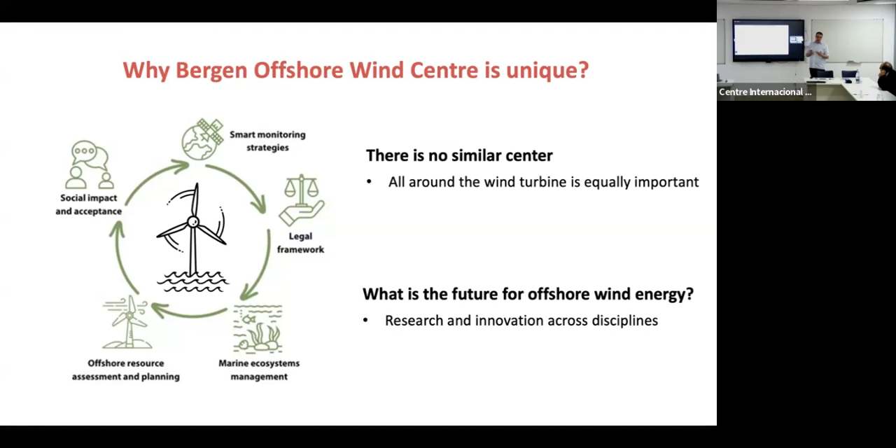We have a lot of phenomena going on, and we would like to take this information into account. So many data, and we have data that we can label as hard data, the wind velocity, the mechanical properties of the soil, but we have also the opinion of people, and this is something we call soft data. So the idea is to use this information to take decisions, and this is something that we are working on. And we are convinced that the future of offshore wind energy depends strongly on carrying out multidisciplinary research.

So a little bit about the center: we have more or less 44 people working in the center. 20 of them are professors and associate professors. And then we have more or less 25 PhD students, also researchers and postdoctoral researchers. Currently we have a project portfolio of 156 million Norwegian crowns. In euros, you have to divide by 10, and this is more or less the budget we are relying on. This is a new center, we started in 2019, and I took over as director in January 2023. So we are growing, we are becoming better, but we are still starting with the center.

Is this a public center, private? It's a center that is located at the university. So you don't have a VAT number? Not yet. No. It's a university. Yes, yes.

Okay, so now I would like to move to the more technical part. And this is something that I always say: it is important to work with methods and with applications. If you only work with methods, you will lose connection with reality. And if you work with applications, there is a big danger that you are not using the best method to solve your application. So you need to try to do both at the same time.

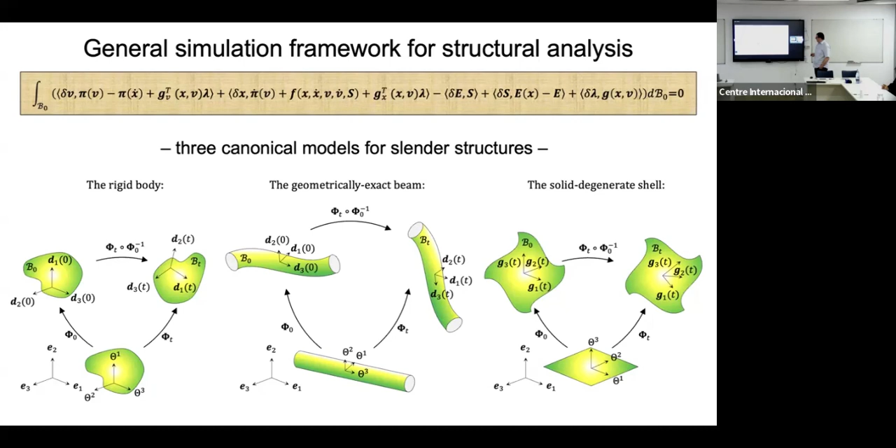So, when we have these kinds of formulations, it is important to be sure that they are working well. For instance, with the static analysis of this structure, a ring, we apply a moment and perform the deformation, and we can see that the load factor versus the displacement develops a trajectory. With the formulation I'm using, the trajectory is always the same. But other approaches based on updated Lagrangian formulations compromise these properties. Of course, it depends on the application. If you want to simulate punching processes, you don't need this setting. But if you are simulating wind turbines, after many rotations you are going to have information that is not right. With this formulation, we avoid these issues.

This kind of formulation can also be extended to general cases. Here we have a shell, and we release the shell to move and deform. We can see that with these methods we can preserve linear momentum, angular momentum, and also energy. But shells are very prone to high frequency content, and this can blow up the simulation. Something we can add is dissipation. Dissipation is good, but we always need to do it very carefully, because we don't want to spoil the solution. So here we can formulate dissipation functions that mitigate the high frequency content. As we have a nonlinear system, unlike a linear system, you cannot separate all the frequencies. We have the theorem for equipartition of energy, and after some time the energy is distributed across all the frequencies. This is why these nonlinear models are very delicate.

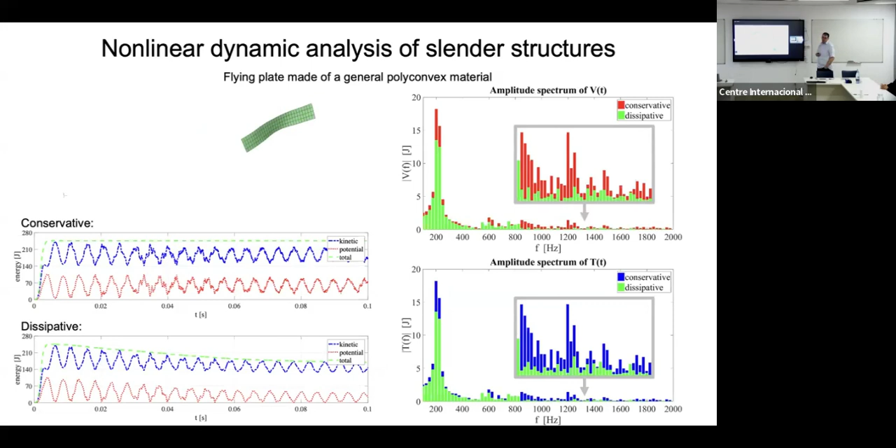Other problems I am working with, also within this framework, are the so-called Kirchhoff rods. I don't know whether you are familiar with this formulation, but basically it is not possible to derive a primal formulation, because these non-shear constraints are not integral constraints. So you cannot have a primal formulation and you need a primal-dual formulation. But if you consider some simplifications, for instance a symmetric cross-section and a rod that is initially straight, this is the only case in which you can develop such a primal formulation. This is what we did a couple of years ago. Our motivation was to investigate mooring lines for floating wind turbines. But you can use it for bridges, or any rod, with this kind of formulation.

And then something that we can see here is that we have the geometrically exact formulation, which is basically a generalization of Timoshenko, in which we have shear deformation. And you can see if the shear constant is low, the vector that is perpendicular to the cross-section is not tangent to the mean line of the beam. If we are increasing this factor, we are going to see that this model is converging to the solution provided by the Kirchhoff rod.

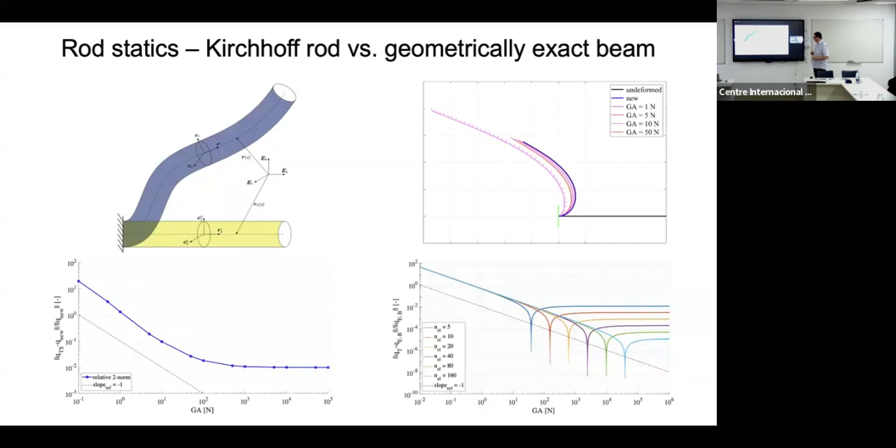And therefore, you can see this peak here, and this peak you don't observe here because in this kind of situation, the axial part is dominating, therefore is masking these peaks. And also, the position of these peaks depends on the discretization. So when this edge of the structure is getting smaller, these peaks are moving toward the right. So basically, this gives us a good idea that the model is working properly.

Then also, you can use this kind of model for doing dynamic simulations. You can use this for DNA simulation. You can use this for spaghetti simulation. So there are many things you can do with this. And basically, we have this model in which we apply some symmetrical condition to make the system rotate and deform. And we apply this for the geometric exact beam and also the Kirchhoff rod. And we saw that after some time, the trajectories are different. And they are not different because of artificial numerical aspects, it's because the models are different.

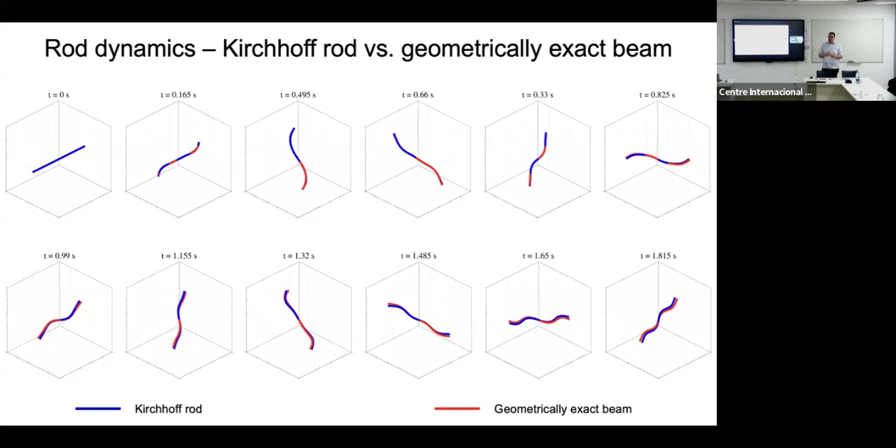Then another thing that we can do with this is, as we are not using rotational degrees of freedom like angles, we are using directors. Basically, we are relying on several manifolds like the unit sphere and the SO3 manifold. And what we have here, in the first case, is a shell pendulum that is allowed to move like a pendulum, but it's a 3D body. And the idea was to try to investigate whether we can find patterns of motion.

But you know, basically what you do when you have this kind of problem, you apply, for instance, modal analysis, and then you have your modes, or you can apply POD. But do you know why we cannot do this with this kind of structure? Because the configuration space is not a vector space, it's a manifold. So you can use POD, principal component analysis, modal analysis only when your space is a linear space. In this case, we are dealing with manifolds, so we don't have that structure.

But something that we can do is, if we have the trajectory on the manifold, we can define a point, a tangent plane, and do a lift of the trajectory. And then in this plane, we can carry out principal component analysis. Once we identify the modes, we can reconstruct the trajectory and project back to the manifold using the exponential map. And this is what this is about. So here you have the manifold. Here we selected one point, and this is the trajectory that we have in the tangent plane.

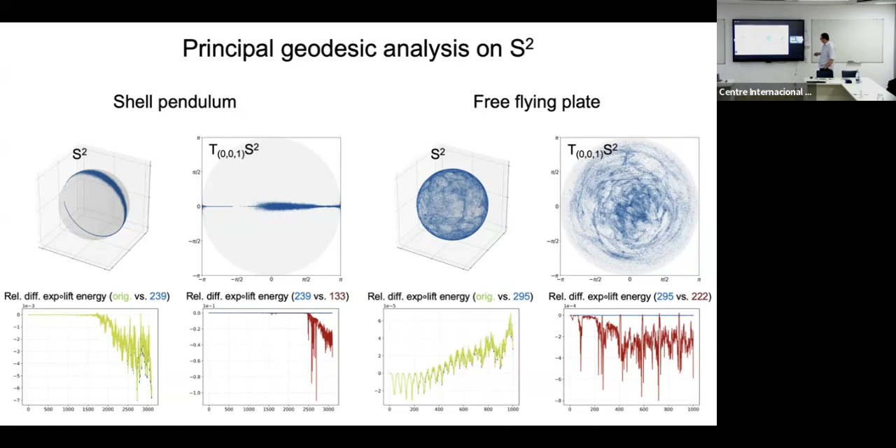So the idea is we would like to use these techniques to analyze real structural problems, to apply this technique to offshore or onshore wind turbines, and to use it for structural health monitoring. Because if you have a wind turbine blade, you can try to follow the frequencies of the blade. But as soon as the blade is rotating, you have geometrical stiffening, and the frequency goes up. Nothing is wrong with the blade, but you have the term coming from the geometrical stiffness. So you cannot rely on observing the linear modes to say something about that structure.

So what we did is we applied this technique, not to do structural health monitoring at first, but at least to see whether we can recognize some abstract structure in the motion of the wind turbine. We did the same analysis: a simulation with the wind turbine, the lift, we computed all the singular values, and then projected back. Then we also considered this with a reduced number of modes, and a very extreme reduction of modes. And the behavior of the energy is consistent with what we saw in the simplified cases.

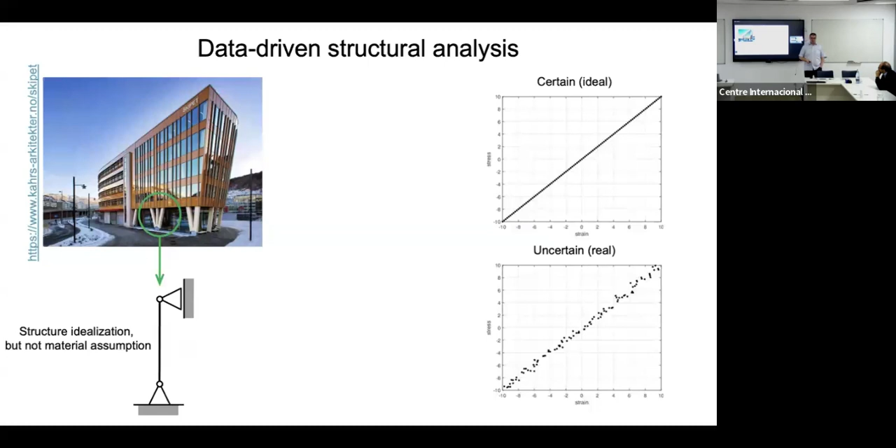So reality is even more complicated than that. But the question is, is it possible to relate this kind of setting with this kind of setting? And the answer is yes. And basically what we can do is to define an optimization problem with the following structure. So we are going to minimize a cost function in which we look to minimize the distance between the internal state of the system with respect to the data we have. So we have here in the second line the data, that is a data set. We have a finite number, as much as we want, but a finite number.

And then this equation we have here is basically the equilibrium, the compatibility, and also additional constraints that we can have. And this problem is a very difficult problem. And you know why? So this is a discrete continuous optimization problem. So we have variables that are continuous, the displacement of the structure, the strain, and the stress, the fields that we know when we solve the PDEs. And then in addition, we have the information coming from the experiments, and we have a finite number. So this is a non-smooth optimization problem, and is a problem that can be classified as NP-hard. It means that if we have a solution, we need polynomial time to check whether this is a solution.

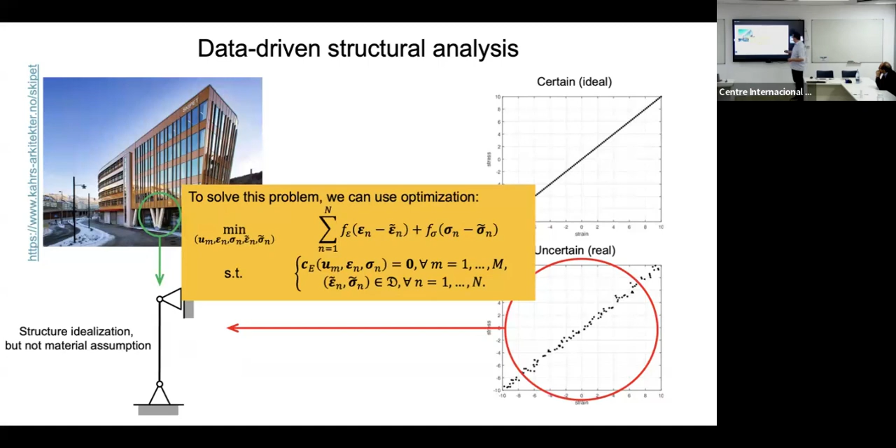So here I have a concrete example. But basically, what we have here is the simplest cost function that we can minimize. So basically, we are having here the norm 2 that we are minimizing, and then we have here stress-strain. Basically, this is an explicit function of the stress as a function of the strain, and then we add some perturbation, but we can have something else. So these are two possibilities. And now when we are dealing with metamaterials and all these kinds of new possibilities we have, something like that can arise. But we need to have formulations that can take into account this kind of situation.

Then what I did here, I solved this problem. Basically, I evaluate this cost function for all the points and different load cases. And what you can see is that the cost function looks like this. And if I ask you, do we have a minimum? Such a thing as a minimum doesn't exist anymore. There are ways to try to say more about this, and this is something that we are developing right now. But it's a very complicated problem. So if this is so complicated for 1D, you can imagine if you have a wall structure and all the components of the strain and stress tensor and so on.

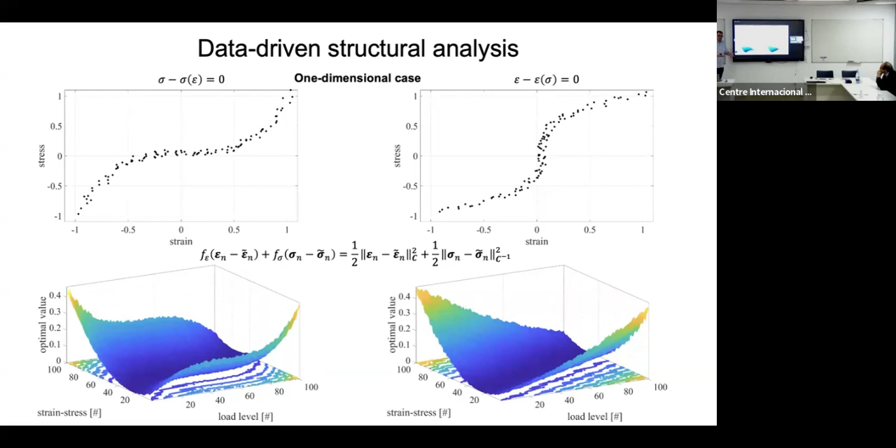So this problem has a very rich mathematical structure. And if you understand well this mathematical structure, you can simplify this calculation and you can obtain results in times that are not as short as the ones that we need to solve the PDE, but times that are maybe 2 or 3 times more expensive. And this is ongoing work right now.

So then I'm going to move to a second part, more on the applications. And I'm going to start with the typical torsion problem, the warping functions. So, you know, blades are made with composite materials. And then when you are going to fit your aeroelastic models, basically you are modeling beams.

So you need to have properties for the cross sections. And this motivated us to take a look on that, because if you have composite materials and also you have a complex shape, multi-cell structure, it's not that easy to determine the warping function. And this was a little bit of theory, but also a little bit of practical work.

And then we realized, when we analyze warping, what is the common practice in engineering? What do we do? We have a problem that has natural boundary conditions, so what we need to do is fix a point. The practical approach is we fix a point to be 0 and then we solve. This works and works well. However, this kind of approach has no counterpart in the continuous setting.

And this triggered us to investigate how to formulate this problem properly. We realized that there are basically 3 kinds of formulations. The first is to look for solutions in a space with average 0. The other one is to impose the constraint with Lagrange multipliers. And the third one, a very good old friend, uses some kind of penalty approach. You can prove analytically that these problems are totally equivalent. You find the same solution, and you can go back and forth. However, the numerical implementation might differ because of conditioning issues and so on.

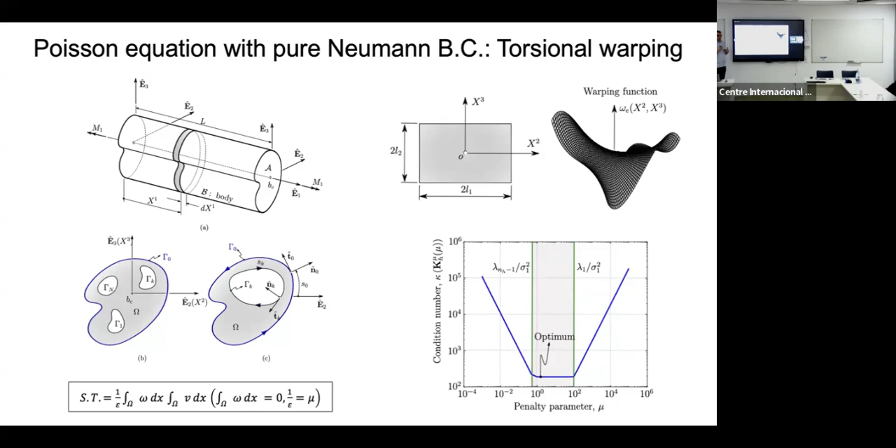So, once we dealt with that, we also realized, coming back a little bit to the previous slide, what happens if you fix the information in one point? You have your finite element model, you fix it, you solve the problem, and you get a solution. And this solution is consistent with these approaches that we have here.

But if the discretization is going to 0, then there is the trace. You have the trace operator that allows you to extend information in the boundary into the interior field. When you have, for instance, a codimension equal to 2, the trace operator is no longer bounded. So basically, you have no theory to deal with that, and you cannot find a limit case for this approach. Probably it's not new, it's known, but we didn't find many contributions in this regard in the literature.

So once we had this working, we investigated different situations. Let's consider a section in which we have two materials. We played with different materials with different coefficients and observed how this modifies the solution. When the quotient of the materials is equal to 1, we obtain what is usual: the symmetric behavior, and here the antisymmetric behavior. But when we have a different ratio, we observe a perturbation.

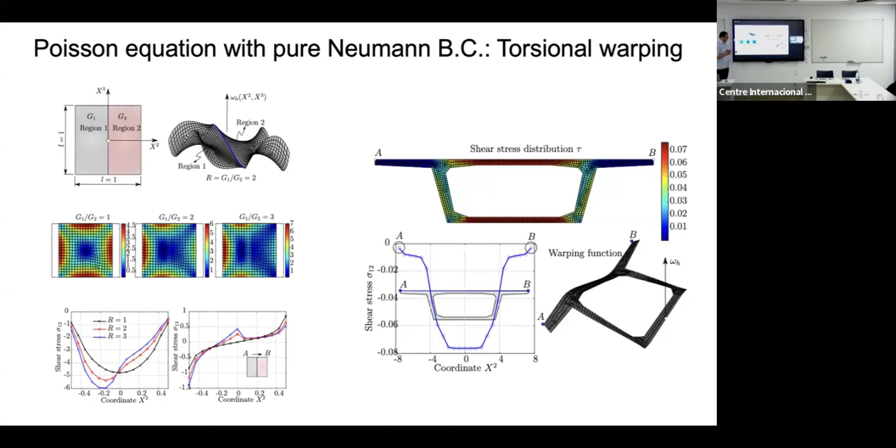Something very important in civil engineering when you compute bridges, when you have loads acting on the bridge, is to know how the bridge is going to deform the cross-section. This is a benchmark that is well established in the community. We checked this methodology, and it's working as expected.

Another application is mooring lines. These are cables immersed in water. In this case, we are considering a cable of aluminum, and we have water at rest. On the free end, we apply a vibrating force, and we give as input the amplitude and the frequency.

We realized that when the frequency is higher than a given frequency, we get this shape, and the structure remains like this, like an L. At the beginning, we thought this was only of academic nature, but indeed, this can also happen in marine installations. The setting is different because you have the anchoring system here, and the pulsating load comes from the free end on the surface. But this behavior is something that we can observe.

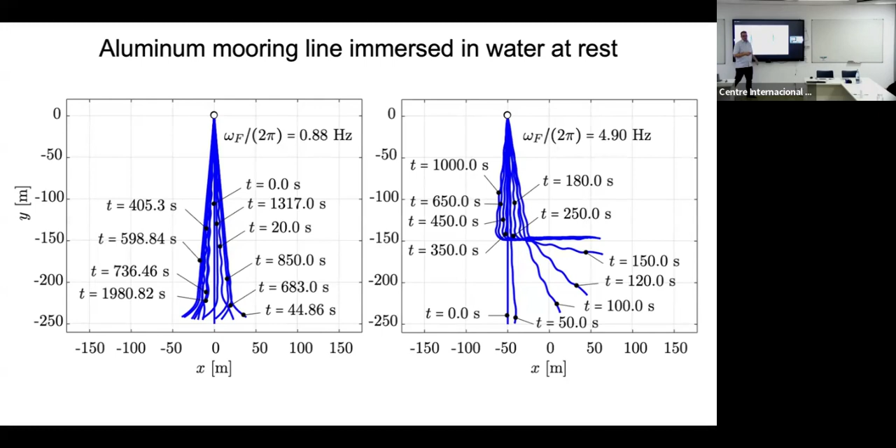So you can see here this frequency. This is the subcritical behavior, and this is the supercritical behavior. And then here, when we have the mooring line, we have force that is tangent to the mooring line and force that is orthogonal. And among all the forces coming from the fluid, we can identify the added mass. We have the tangential drag, and we have the normal drag.

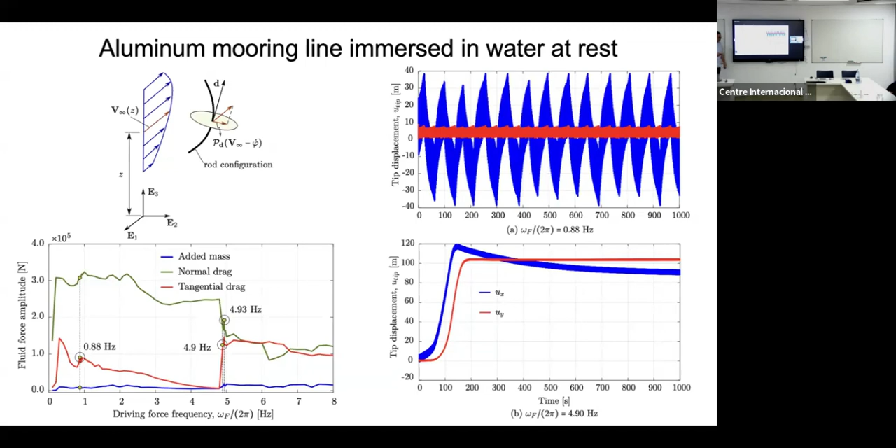And we can see that for subcritical frequencies, the normal drag is the dominating one. But when we move towards the supercritical regime, what we can see is that the normal drag and the tangential drag are equally important. And this is something that you can see in the plots for the displacement. The first one is for the subcritical behavior, and the second one is for the supercritical behavior.

So basically we have models for the structure with slender structures or beam shells and so on. And when we compute the dynamics for wind turbines, we need loads. So I'm not that good with flows like you, Sergio. So I am applying a very modest flow model that is a boundary element method. And this method allows us to compute the loads in a good way, and also to compute the wakes.

And basically, this method works well for wind turbines when you want to compute loads. But if you want to compute more details, you need something better for sure. However, this is also cheap enough. So you have engineering approaches in which you need seconds. With this kind of method, you are talking about hours, and if you go to CFD, we are talking about weeks or months, I don't know.

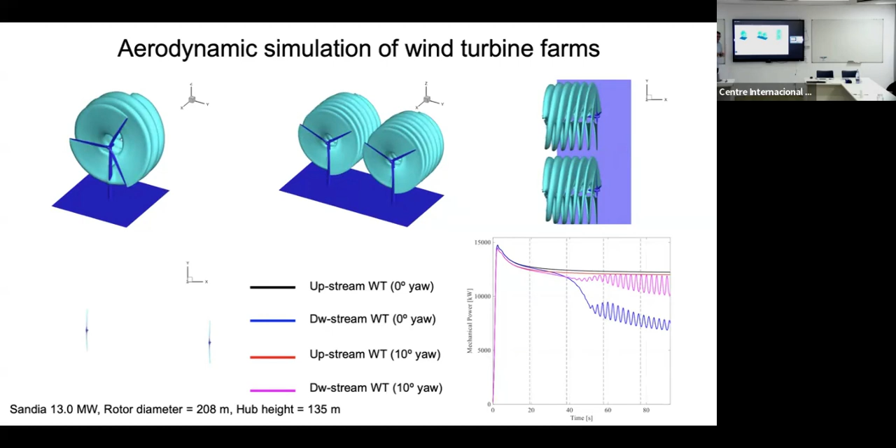And we can investigate several phenomena. And also in this model, we have several things applied in order to have more reliable simulations and also faster simulations. So we have particles, and we have also diffusion models. And we are doing the work now to compute this with the fast multipole method, and this is going to be even cheaper.

And then you can see here, in this plot, we have the mechanical power of the wind turbines. For the first ones, what you have is black and blue. So this is the one that is in the front, and this is the one that is behind the first wind turbine. But if you change the yaw a little bit, you are going to see that the degradation of power is going to be less.

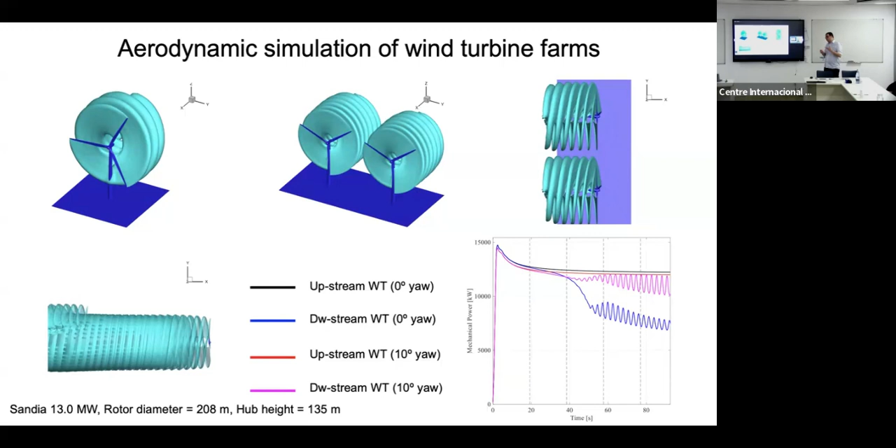However, we have some oscillations there, and these are caused by the interaction of the wind turbine with the wake. We suspect that we also have a numerical component here. You know, boundary elements are basically singularities. And when you are too close to singularities, your solution is not that reliable.

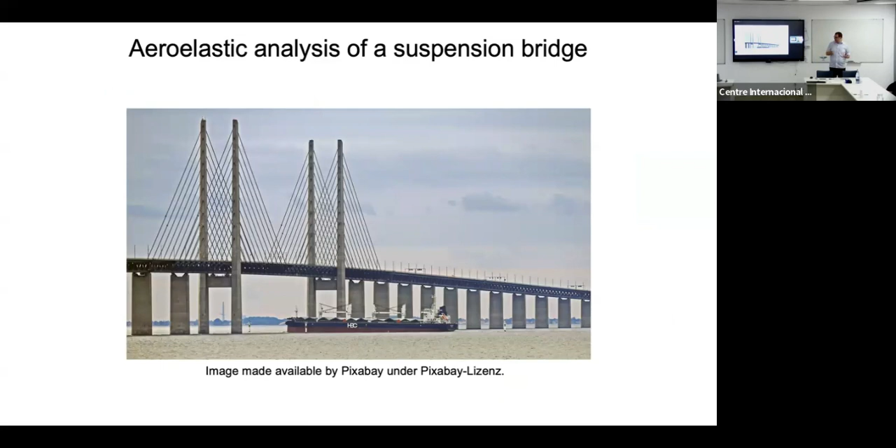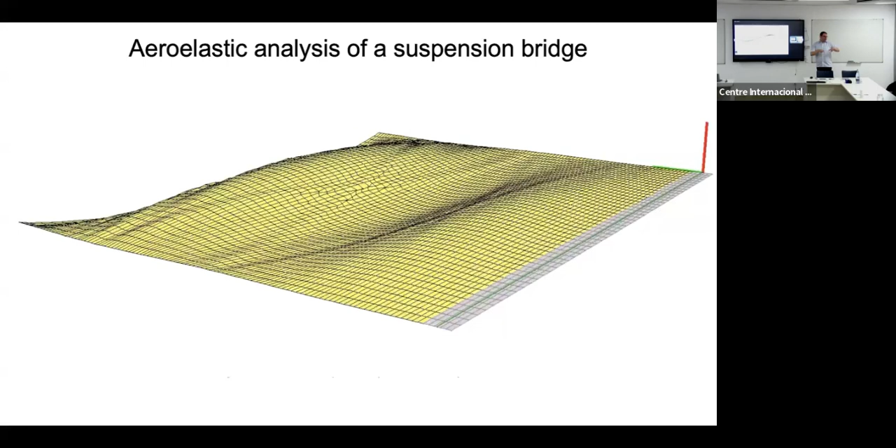And the idea of this setting is to apply this, for instance, to a bridge or to a wind turbine. And this is what we did. This is an aeroelastic model for a bridge, and you can see we compute the vibration. So we have a geometrically exact beam, a nonlinear beam model that admits shear deformations. And then in gray, we have the aerodynamic mesh, and what we have behind is the wake.

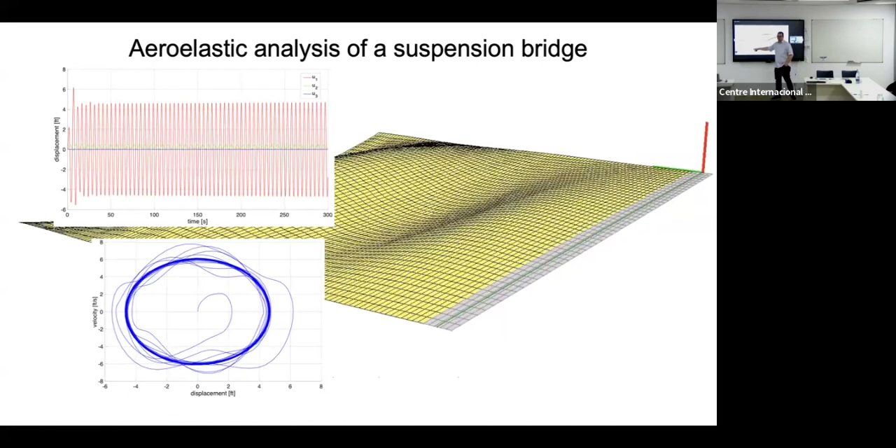And something that we can see is that this structure is reaching something called limit cycle oscillation. So you remember the Tacoma Narrows. When you go to physics, they say, oh, this was resonance. No, this is not resonance. This is flutter, because the wind is blowing at a constant speed. There is no pulsating or oscillating load. This is an interaction.

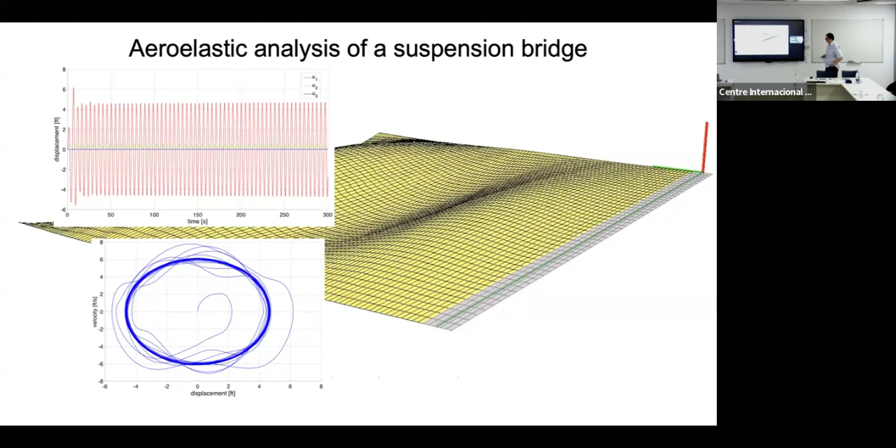So when you are below the critical condition, the flow is taking energy from the structure. When you are in the critical condition, the balance of energy is zero. And when you're in the supercritical condition, the flow is adding energy to the system. So something I would like to comment on is that we have here a fluid-structure interaction scheme that is strong.

And if you like to investigate this kind of non-linearities, you need to have a strong interaction scheme. Otherwise, it's not going to work well in general. And something we did in order to improve the robustness of the method is to compute the linearization of the aerodynamic model. It's a tedious work. So there is no big scientific innovation there, but it's a tedious work.

And we did it and we implemented it, and we are obtaining with the fluid structure interaction scheme quadratic convergence, which is quite weird. I'm not familiar with many fluid structure interaction schemes that converge quadratically. But the reason is not the convergence in itself. The reason is because it's more robust.

So when you are going to a nonlinear phenomenon like flutter, if you don't have a strong interaction scheme, basically what you are going to observe is that the flow and the structure are divergent. So probably you're not going to get a solution. And with this kind of scheme, this is working very well. So they are working together well.

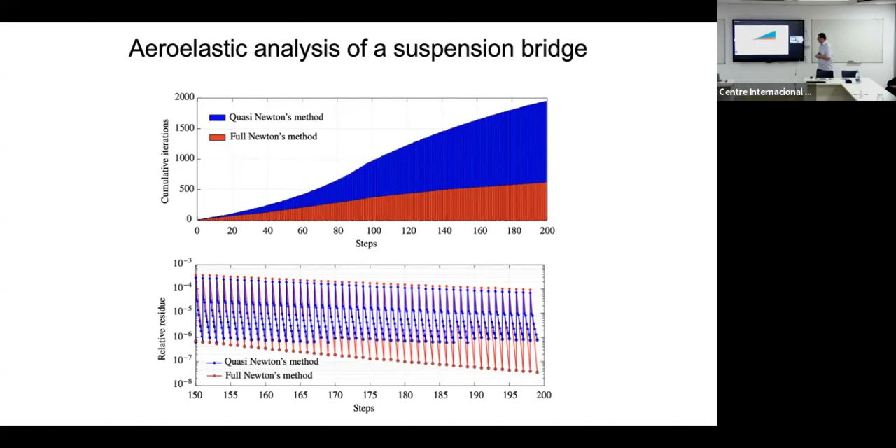And something that we are doing is we don't need to have this strong all the time. So when we have some situation in which the changes are not that big, we use some kind of, this is still strong, but we don't use the full linearization, we use partial linearization. Then when we enter in this kind of phenomenon, we turn on the exact linearization for the fluid. And this is giving us a lot of robustness.

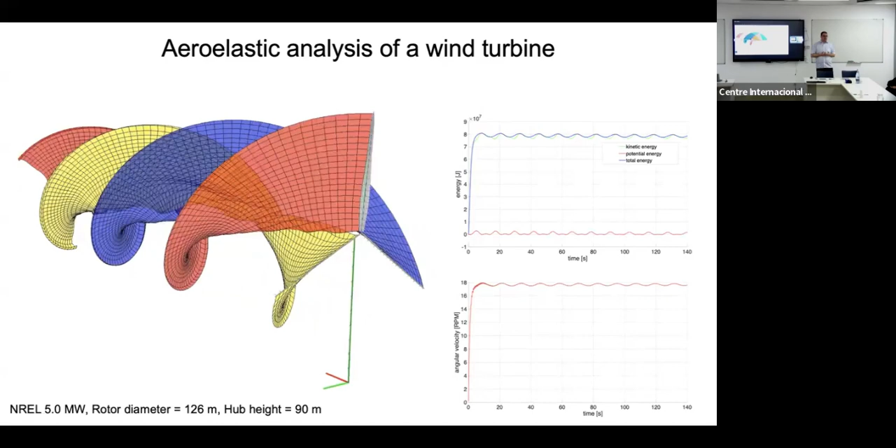And then we apply this also for wind turbines. Here again, we're using geometric exact beams. We're using momentum preserving, energy conserving, or energy dissipating algorithms for integration in time. And these simulations are cheap, I would say.

And here you can see the angular velocity of the rotor. Here the rotor is free to rotate. We are imposing nothing. And then we can see here the mechanical energy. So this is the energy coming from the structure, the elastic energy and the kinetic energy of the motion. So this is also having a very good behavior. And for us, what is important is the long-term dynamics.

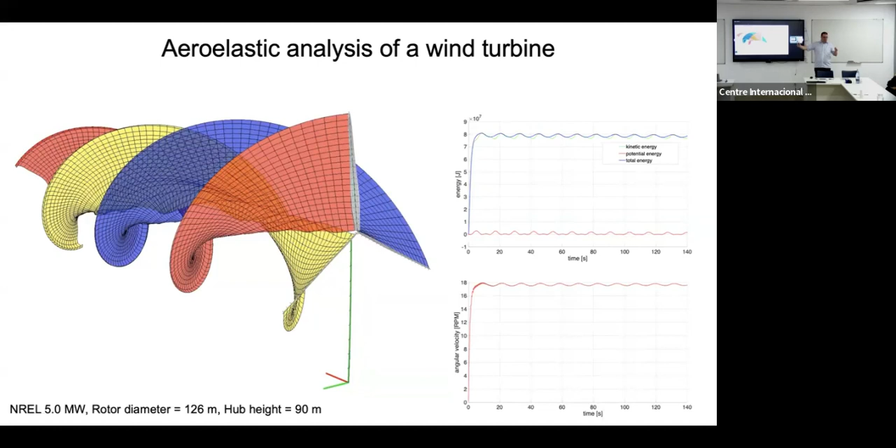And then this is something that we are now starting to investigate. I'm not very familiar with neural networks, but I think we need to give it a try and see, but we need to use this carefully. Not as a black box, we need to try to understand what is going on. And the idea was to apply these neural networks to investigate the ability to predict nonlinear phenomena.

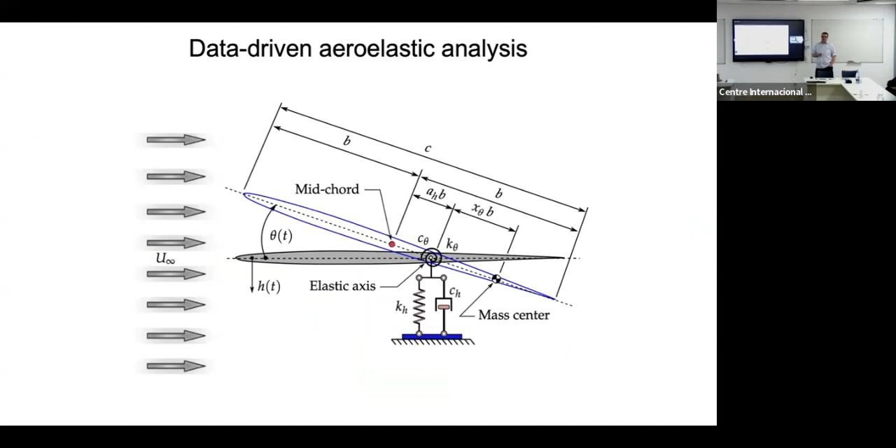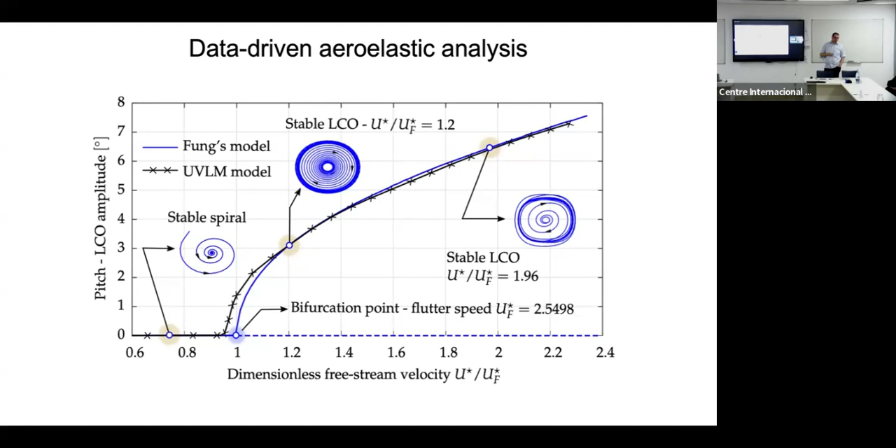And basically what we did is we took two models, basically the structure is the same, but we are taking a very simplified model and a little bit more sophisticated model. And we did the training and we investigated the statistics and the performance of the different neural networks. And basically, if the neural network is not complex enough, you are not going to capture the nonlinear phenomenon.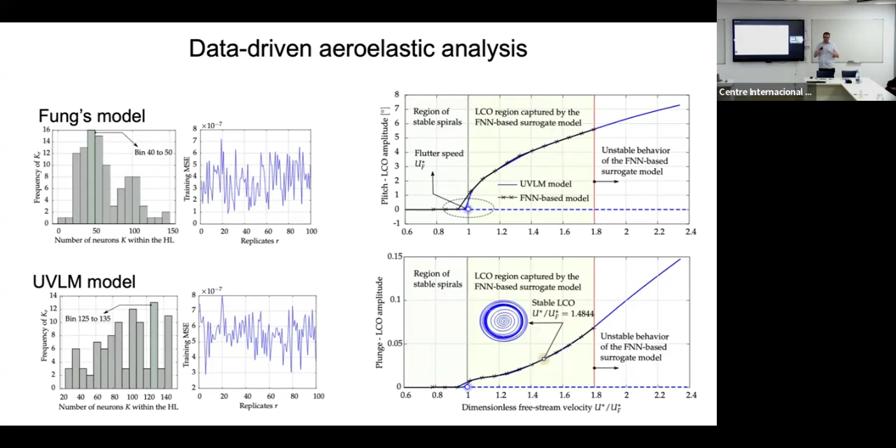So the neural network worked well with the Fung model, that is an analytical model, but for the unsteady vortex lattice method, the performance was not that good. And after some velocity, we observed that the predictions we obtained with this setting were not good enough. So now we are starting to learn how to deal with this, and we are starting to investigate different topologies for the neural network.

So basically, this is the motivation. Pay attention to the models, try to develop good models, and sooner or later you are going to find many applications. I don't like this kind of models that work well for a single application. Sometimes we need to deal with that. It's okay. But let's try to do it a little bit better.

And something I would like to comment to you is I'm not only dealing with computational mechanics. So this is an example of multidisciplinary research. And this is a satellite image of the German Bight. And you can see all these black dots, white dots you have there. So basically what we have here is the velocity field. This is a satellite image, and you can see the wind turbines in these white dots, and we have the wakes.

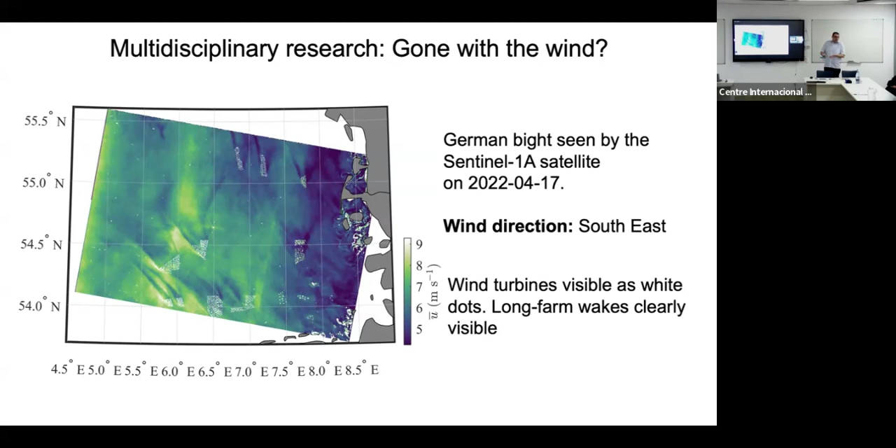So the wakes do exist. And in the wake, there we have basically less energy, and the form of the flow is not the optimal that we need in order to harvest energy from the wind. So the thing is, when we are designing wind farms, it is very important where we are locating the wind turbines. And if in one place we have one operator and in the other place we have another operator, maybe there we can have a problem because one can ask for compensation because you are stealing the wind.

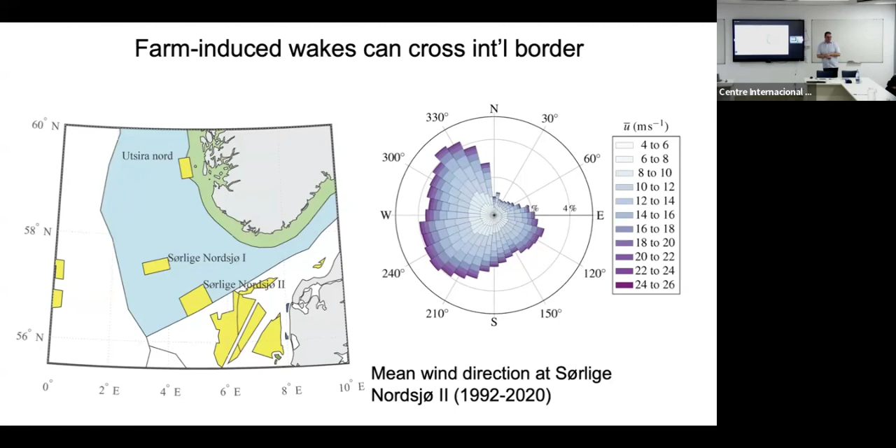And I don't know whether you know, but regarding energy, Norway and Denmark had some issues in the past. And before having this kind of problem, it's important to try to understand how to solve it before it arises. And from the fluid mechanics point of view, it's extremely complex because we are dealing with large scale, we have turbulence and wind profiles, and we have everything there. However, the big problem is not on the technical or the physical side. The big problem is on the legal side.

So something we did is with some geophysicists, lawyers, and myself, we wrote a publication trying to formulate this problem with some kind of physical argument and then moving from the physics to the legal part. And regarding the legal part, it is quite complicated because you have two figures, basically. Living things, this is fish, and non-living things, this is oil and gas. And wind is neither. So there we have some kind of legal vacuum we need to try to understand.

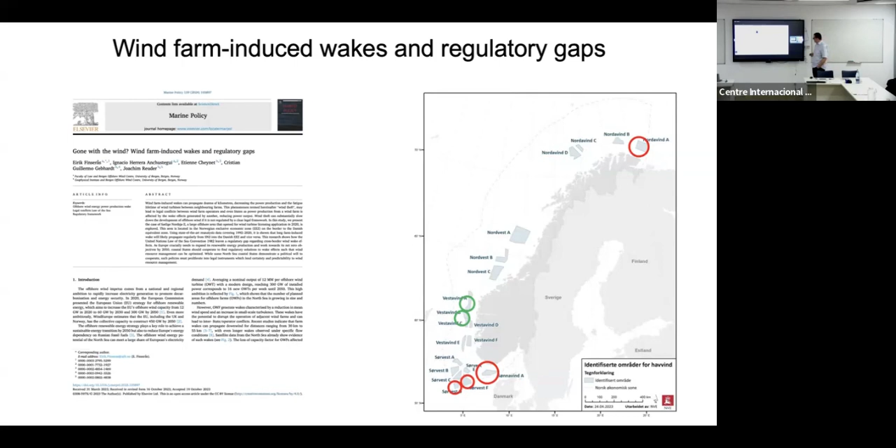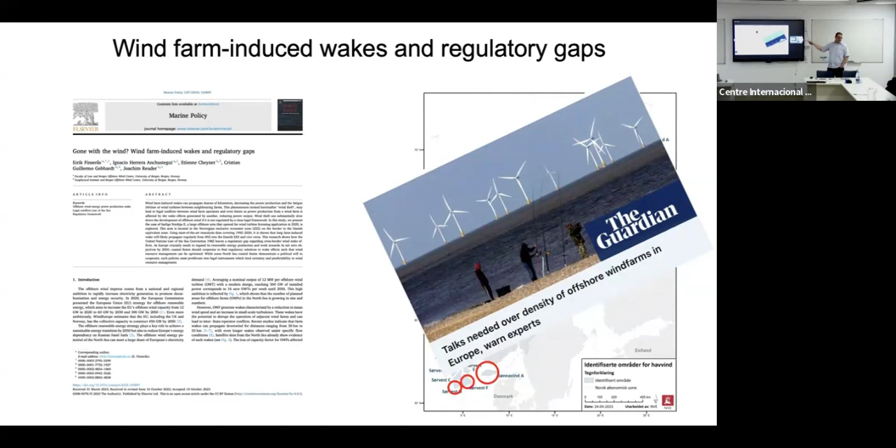And this is not going to happen only in this field, it's going to happen in several fields in Norway. And this is something that is going to happen in other places. So there is something similar between Belgium and the Netherlands, also Germany with other countries. So this is going to happen. And the interesting thing is that this newspaper, they wrote an article about this and they are citing our article. So I am quite happy about it.

Yes, and then just to finish this presentation, I would like to present a last slide about my project. One year ago, I got this ERC Consolidator Grant with the title Data-Driven Offshore. And here, the idea is to apply this data-driven approach, not the one based on neural networks, the first one we saw in this presentation, to the aerohydroelasticity of offshore wind turbines. And the idea is to integrate the data into simulations. And with this, we would like to improve the predictive capabilities of our simulation setting.

And something that I would like very much to do is to create digital twins that are well-defined from a scientific point of view. Because nowadays, digital twin technology is much of a business model for big companies. And the idea is to use this real twin and the digital twin and to use this data-driven computational approach in order to exchange information.

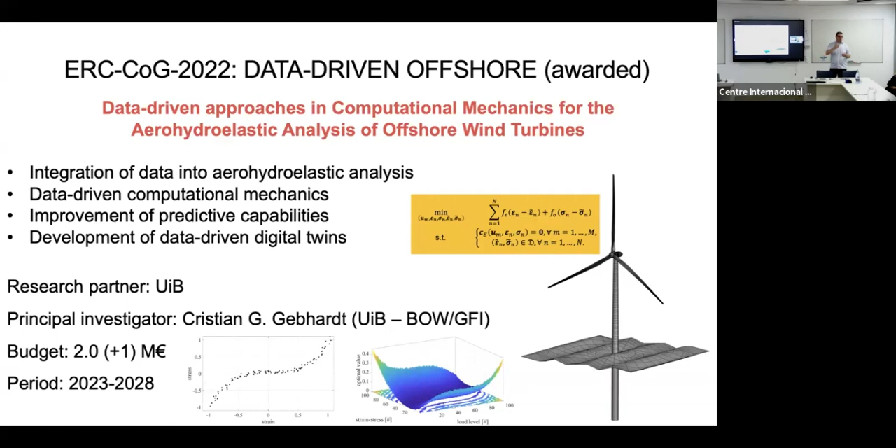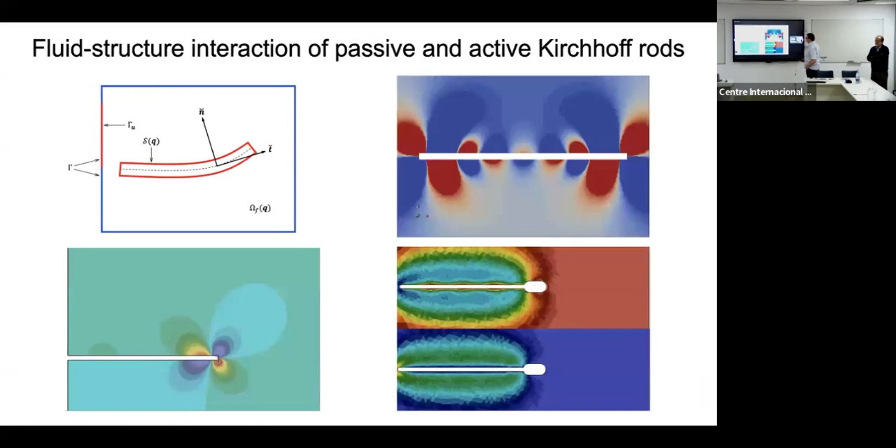Question? What's the profile of the researchers in your institute? Because you have presented a number of methods that are quite, I would say, advanced in the structural mechanics field. Yes. This is basically my research. This is only my research.

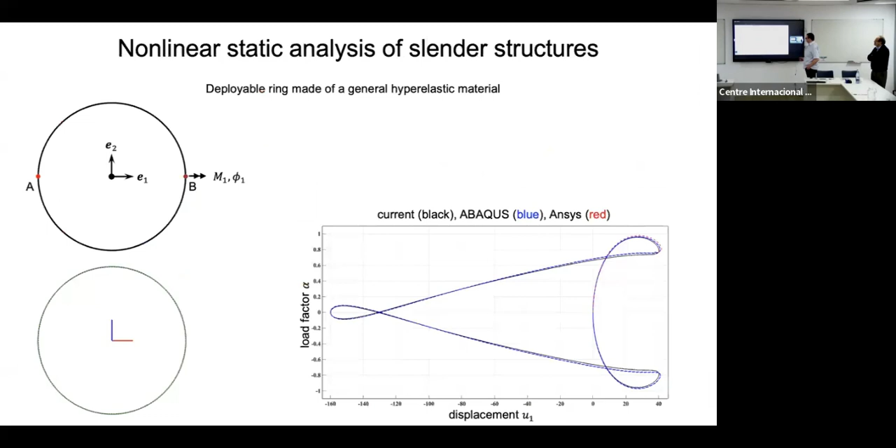This is your research. And do you have the counterpart in the institute? Do they have people that know about this? Are they familiar with this sort of, I would say, consistent, exact solutions and this vector? Dr. Ubaki, his thesis is also in these vector-oriented manifolds for shells. So the question is, do you have a group on that, or is it just you? No, I have a group. So I started in Bergen exactly 3 years ago, okay, and I am building a group.

Okay. So basically, we have the center in which we are trying to combine geophysics, geology, informatics, physics and technology, biology, law, social sciences, and now we are incorporating psychology. Yeah, that's fine, but you find that you need some experts. Yes. And the field you mentioned is very specialized. Yes. And sometimes, for instance, we have people here who come and do this data-driven. They don't know anything about mechanics. Yes. There is a danger. Yes, of course. The question is, do you have more experts on this? So it's hard computational mechanics.

Yes, in Bergen, we have the Faculty of Mathematics and Natural Sciences, which I belong to, and we have a group of applied mechanics, and they work with fluids and also with solid mechanics. They are quite good in porous media, finite elements. They're quite strong, but they are mathematicians. So this is not useful. No, but they are so useful. But what they are doing,